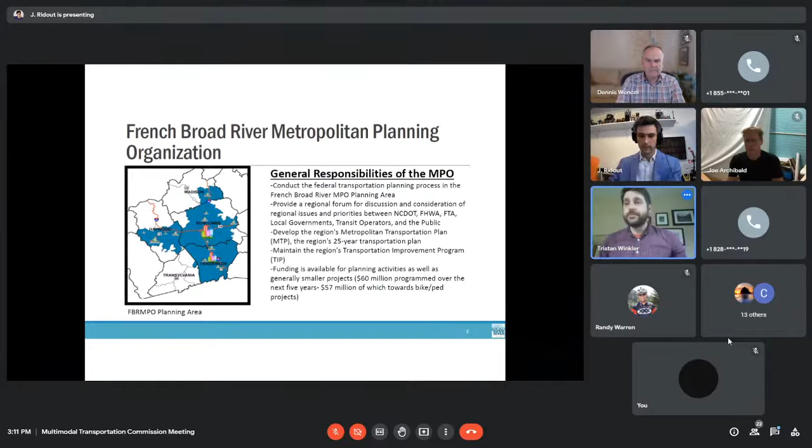So just a little bit on the corridor studies program that we've started very recently over the last couple of years. We see this as currently a partnership between the MPO, Buncombe County, and the City of Asheville. And also to note, we brought along NCDOT for these studies as well, and they've been fantastic partners throughout them.

Generally, each study provided multiple opportunities for public input. So it's a bit different in terms of the project development process that we've gone through in the past for other projects. Also, these documents are meant to give us a starting point for a vision of positive change for each of these corridors.

A lot of what's mentioned in the city's comp plan and some of the city's other transportation plans are really talking about large wholesale changes to a number of corridors. We haven't addressed all of them yet, but to get started on these two, really what we're talking about is changing the way these corridors work and how people move within and through them.

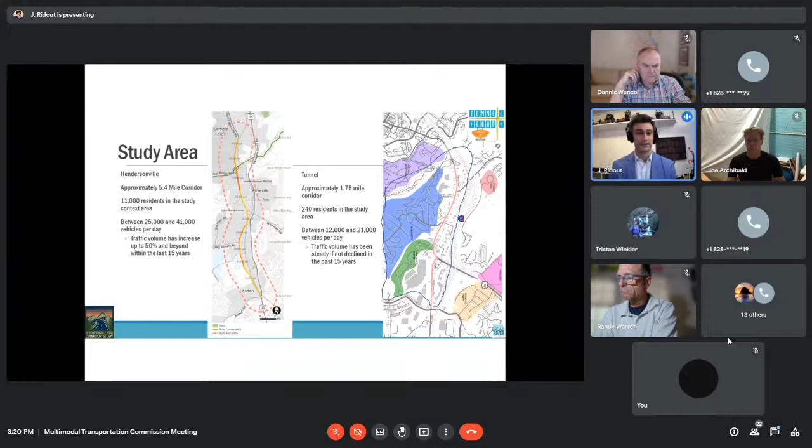In comparison, Tunnel Road within the study is actually a much smaller segment, and it only has 240 residents. While Hendersonville Road has been growing significantly, Tunnel Road's been seeing a different trend - its traffic volume is about a half to a third, and traffic volumes have actually been steady to slightly decreasing. I'll put an asterisk on that because unfortunately I-240 has been absorbing a lot more of that growth.

As a result of the different natures of both corridors, the consultant teams provided a different outreach process for each. Hendersonville Road provided more of what I'd call a broadcast outreach process with the community - they did a large online survey and held 2 very large public come-one-come-all meetings, as well as 6 visioning and design meetings in fall of 2020. So they had a numerous amount of meetings as well as focus group meetings, but considerably smaller in amount than Tunnel Road.

Tunnel Road, with its smaller population base, actually took a different approach. Granted, both of these studies took place during the 2020 COVID realities at the time. However, Tunnel Road had much more extensive stakeholder and focus group sessions - whereas Hendersonville Road had about 36 stakeholders, Tunnel Road had about 70. In addition, they conducted an NCDOT field walk in September of 2020, almost a year ago now, where we walked the entire corridor within the project. Then finally, they rounded things out with a large public meeting at the end to present the findings and take additional feedback. So both projects experimented differently with how to conduct public engagement during 2020.

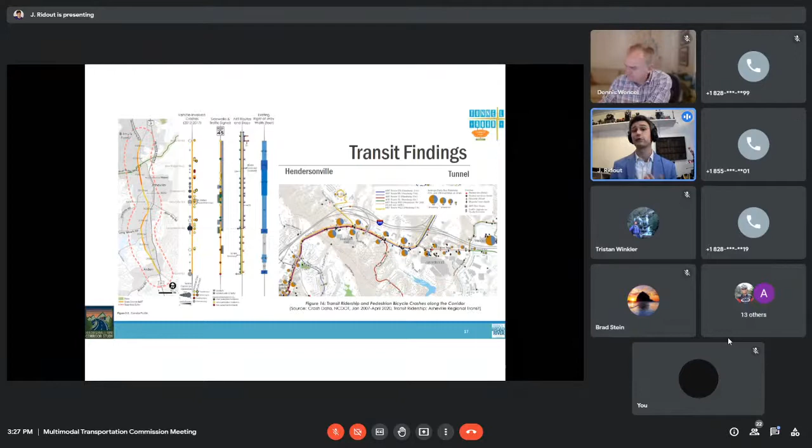We laid in some market findings as well. As I was saying earlier, Hendersonville Road is experiencing a lot of growth. However, it's relatively what the consultants called a firm situation, where we're not expecting a lot of the parcels to turn over rapidly. There are a few ripe spots for development opportunities, but for the most part, what we have on Hendersonville Road from the foreseeable short-term to mid-term future is kind of what we're going to have looking forward.

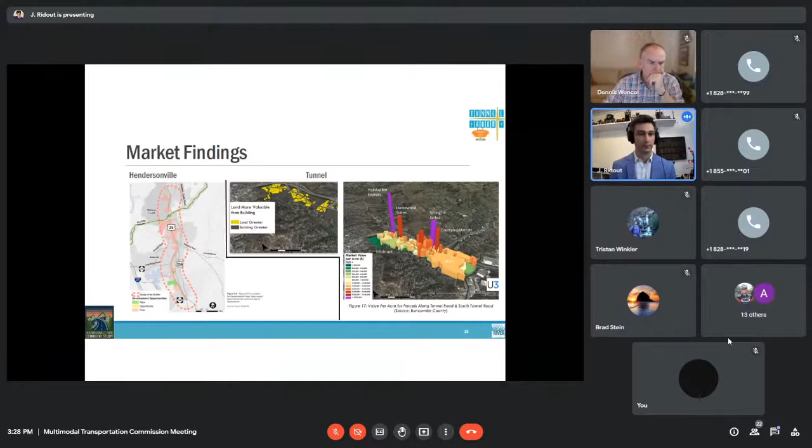On the other hand, Tunnel Road is a little bit more ripe for redevelopment. I think at this point in time, with both the mall redevelopment and Innsbruck, you're starting to see folks looking at this as a place for redevelopment opportunities. So we've taken the safety elements, the transit elements, and the redevelopment options, and layered them with what their existing plans are going to be proposing for this corridor.

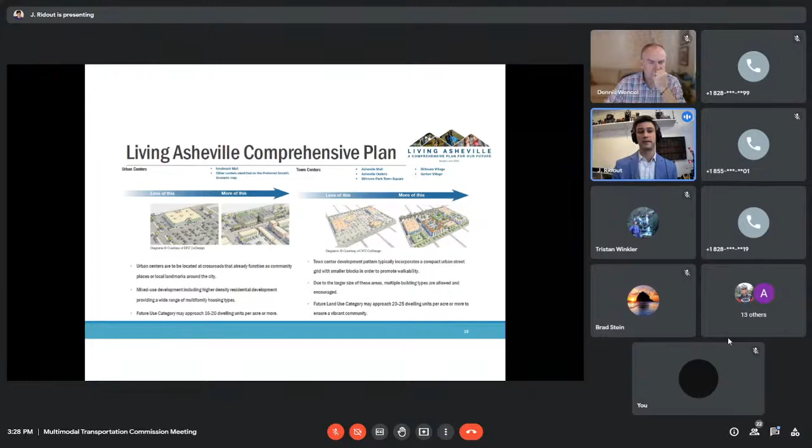So we're now saying, okay, what we know of the existing conditions, now let's layer in Asheville's comprehensive plan to see what the land use is going to dictate. The comprehensive plan is going to call out what type of transportation infrastructure we need to plan for and accommodate to make the comprehensive plan fold out appropriately.

Stepping back, looking at the recommendations at a glance, both of these corridor studies focus on safety, multimodal interconnectivity, and different options and alternatives moving forward. Neither of these studies is saying there's only one option. They provide a few different considerations, and we look at the pros and cons of a few items.

Of course, we're adapting existing plans, and both corridors are trying to transition from automobile dependent and automobile necessity to more multimodal corridors. However, they are going to differentiate themselves a little bit.

Tunnel Road is going to have a much bigger focus on redevelopment. It's going to look to transition from a regional automobile dependent corridor to more local multimodal use. It's going to require a bit more of a grid - a grid is going to be key for Tunnel Road.

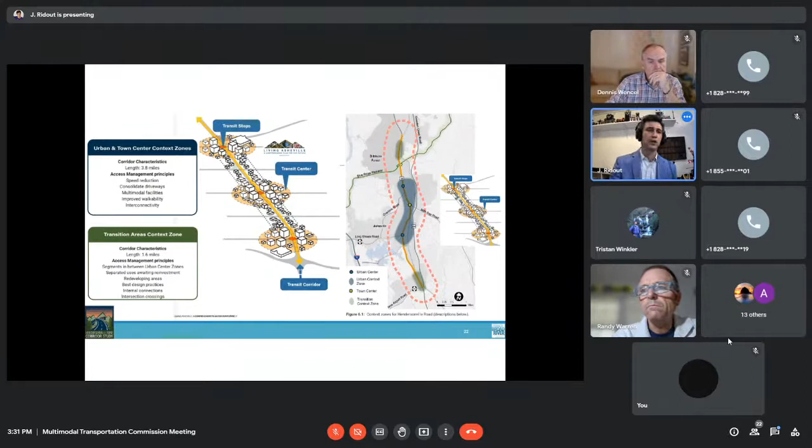So between just south of the Blue Ridge Parkway to Long Shoals Road, we're really proposing a full urban context zone, and a lot of the recommendations are going to flow from that. When I say urban context zones, what I'm focusing on here is, one, we're going to be keeping within the right of way of Hendersonville Road for its recommendations on the road itself.

However, within the corridor, it's looking at actually improving grid connectivity. It's identifying some of the constraints from the lack of interconnectivity - there's a major challenge there because the ability to get between, say, Sweeten Creek and Hendersonville Road, if there's any accident or issue, there's no connectivity in certain spots. So its recommendation is to promote and increase interconnectivity, increase interparcel connectivity.

But on the road itself, what it's looking to do is control a lot of the lane movements. In this case, you're going to have only left turns at specific intersections, and those intersections are going to get a much larger pedestrian treatment and options available to them, as well as improving pedestrian access, also promoting that 10-foot multi-use path along the western side of the road, although that path goes the entire length of the corridor.

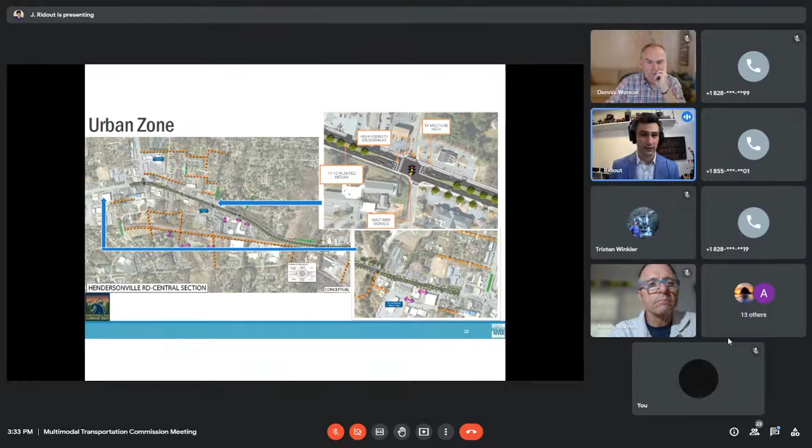So what does that look like to the end user? One, it's going to control a lot of the left turns, and I think that's an important consideration that focuses how this corridor comes together, because there's a lot of user conflicts as a result. In addition, some pedestrian improvements, pedestrian islands, and offering the option of a multi-use path on the western side would create better options for those trying to move along the corridor. Stepping back into the area around the corridor, it's about making sure you have that interconnectivity, the pedestrian access within the parcels themselves.

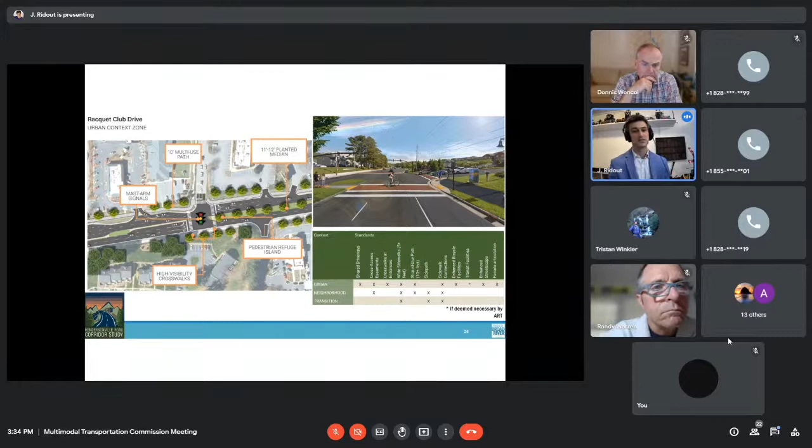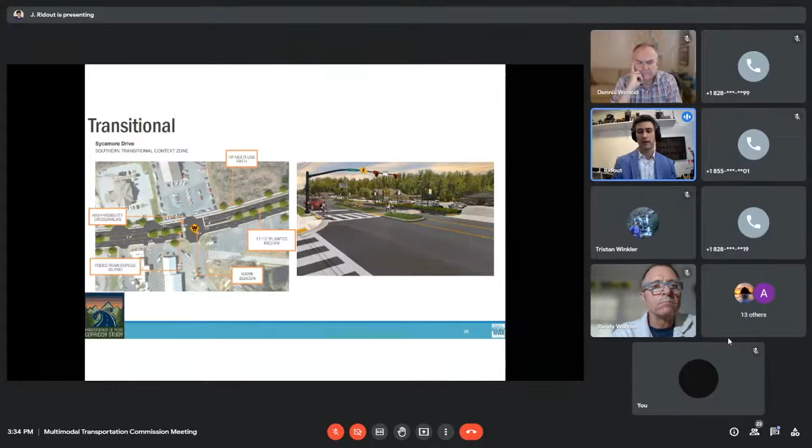So stepping out behind that, in the transitional stages it's dialed back a little bit. In some cases where there's a break in the ability for pedestrians or others to cross, they're proposing HAWK signalizations. They're keeping a lot of the planted medians within this area, but depending on the land use and parcels around it, it's not necessarily as hard a requirement as it is in the urban context zones. So we're still getting the 10-foot multi-use path, but it's building its way towards being more like that urban context zone without requiring the full urban context zone treatments.

Finally, they gave us a potential cost estimate. What they propose in improvements, they really tried to stick to the right-of-way, although they acknowledge that's not going to be 100% doable. There might be items that require stepping outside, but we're probably looking at about $23 million in 2020 or 2021 dollars. Of course cost increases are happening, but that was some of the things I considered: what can we realistically do and provide for an appropriate cost that will turn Hendersonville Road from that 5-lane wild west of automobile use into something a lot more accommodating rather than being a barrier to multimodal use.

So, moving on to Tunnel Road.

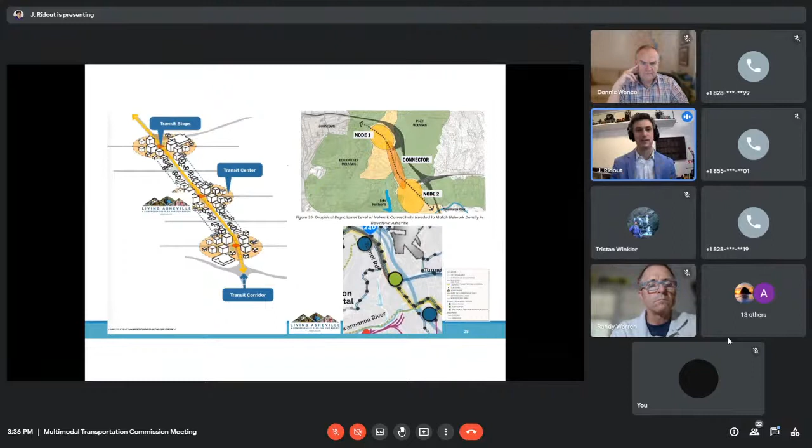Again, we are applying the urban and town centers approach to this. Tunnel Road calls out both an urban center at the intersection of Tunnel and South Tunnel, as well as a town center, and an urban center up towards where the tunnel currently is on the eastern side of the mountain there. But we'll acknowledge there's also another urban center proposed just south of Swannanoa River Road. It's just outside the boundary, but that's something in the back of our minds as we're doing this.

As I said briefly earlier, the main linchpin of the Tunnel Road Corridor Study is developing its grid network, particularly a north-south road probably on the western side of the existing Tunnel Road that extends as basically a parallel road. Right now, our options and availabilities in the no-build scenario, if we don't do anything to Tunnel Road, aren't great. But even if we can address a lot of the things on Tunnel Road, all of a sudden a lot of our options really bloom when we say, okay, if we can have an additional road.

And quietly, a lot of that connectivity is kind of already there. Particularly in the north section, it's just kind of open parking lots or connectivity between a couple of parcels where it's privately held. But if we can formalize this, then the options and considerations for Tunnel Road bloom exponentially. So when we talk about a parallel road, we're looking really at a 2-lane street that's close in and readily available for development. It's not going to be something like another 4-lane road.

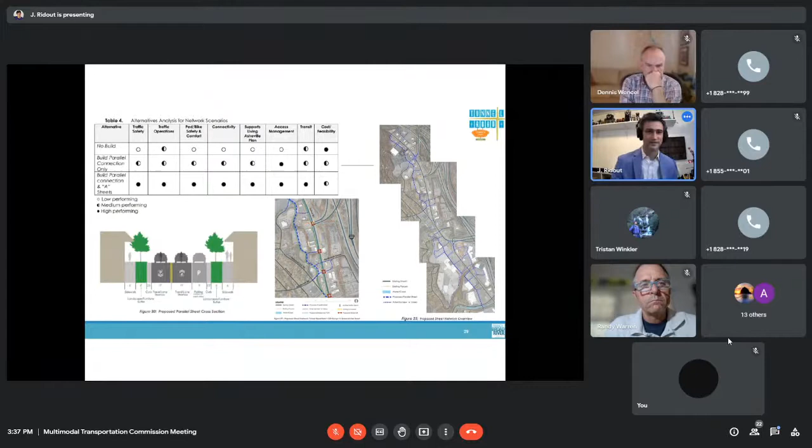I think sometimes there was a worry that we were building another Tunnel Road. But what that does allow is probably something very interesting for anybody in the multimodal group: anytime I can say, hey, let's consider a road diet, that's going to be significant as a recommendation coming forward. So one of the recommendations coming out of this is to actually create a road diet on the northern section of Tunnel Road and drop it to 2 lanes with a turn lane. If we can do that, you can see a lot more improvements coming on. As I said, Tunnel Road's been seeing a decrease in traffic volume.

Some of the volumes we're currently seeing, from about exit 6 north, we could accommodate a road diet down to 2 lanes at that point. Conditions would improve for basically all users if we can get that parallel road working, but that's an option available. The road diet analysis was done and it looks promising.

One thing we heard from our DOT partners is that we can do a lot, but the one rule is we cannot impact traffic backing up onto 240. So we took a look at each exit intersection. One recommendation is that the exit 6 option at Chunns Cove Road could actually be a roundabout, working within the road diet option.

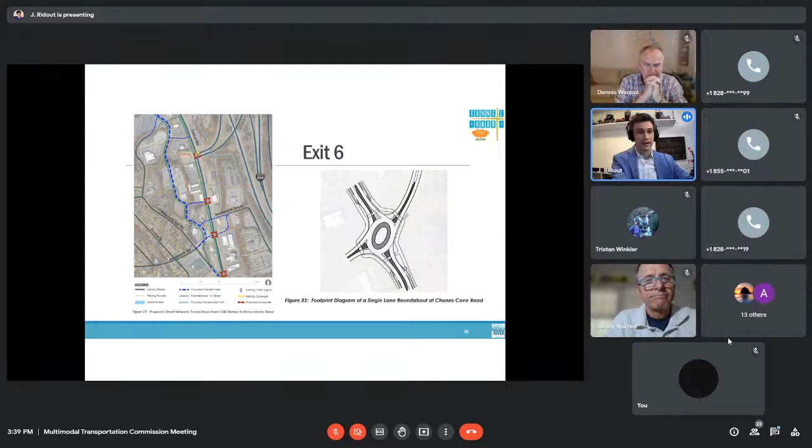Further down, closer to exit 7, this was another corridor intersection we needed to address, and there's a couple of options there. We did look at a roundabout in this particular area, but it didn't perform very well.

Two other alternatives, depending on whether we can get a parallel road. On the left, you have something working within the existing context of the road that can improve the flow of that intersection. Another option is slowly adapting that grid overlay, reducing the travel lanes that have to cross each other, which would make it a lot easier for pedestrians and other multimodal users to get across.

I don't know if many people have walked that corridor, but if you're coming from Tunnel Road, on the other side of the intersection you basically have to walk to the smoothie shop, walk south on South Tunnel Road, cross the road 3 times, and then continue north along Tunnel Road. It's not a very useful option, and as a result you see a lot of goat paths where folks are taking that risk.

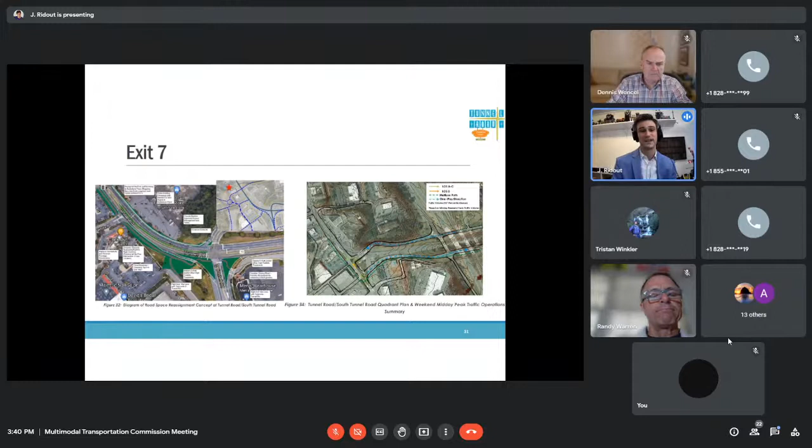So getting back to looking at the different options, we looked at how level of service happened with existing conditions, if we worked only within the right-of-way of Tunnel Road, and if we can get the parallel road with redevelopment and other opportunities. For the most part, we can take a road diet fairly well south.

Up until that I-240 off-ramp just before it starts coming up into exit 7, not quite that far south, at that point we're still probably looking at least a 4-lane cross section, but that's more of an option driven by that interstate interchange there.

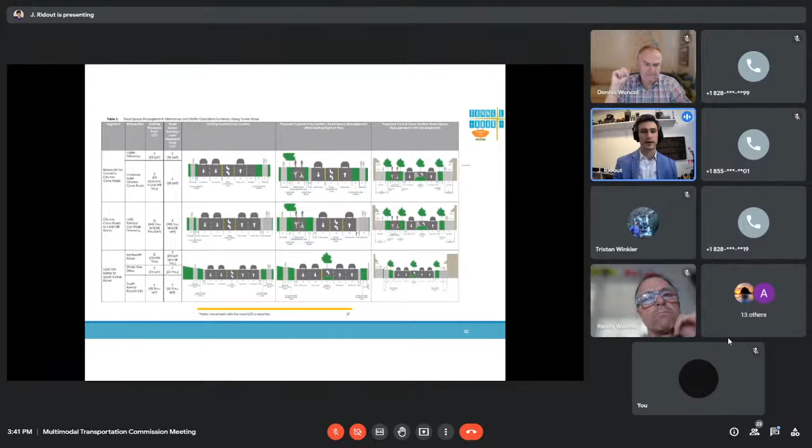So those were the different options we're looking at moving forward. You start seeing these cross sections develop where, existing, we have that 3-4 lane thing right before the tunnel. We can actually work within the existing right of way to provide that separated multi-use path.

And with redevelopment, we can expand some of those options that make the multimodal experience a lot better. Closer to the off-ramp, you're seeing a very similar condition. So at Chunns Cove and that off-ramp, we can still keep things narrow, more of a pedestrian multi-user scale rather than a 4-lane highway there.

But once we get further south, that's when we're seeing that Tunnel Road is still going to exist as a 4-lane road, at least at that particular point. Depending on how redevelopment happens, there could be other options, but that's at least what the data was pointing toward in that situation.

So as a whole, to make all this work, the consultants on both ends provided a lot of different options. The key takeaway here is that to make this happen, and to make it happen on an established timeline, all parties need to work together. The city itself needs to have what one consultant called skin in the game.

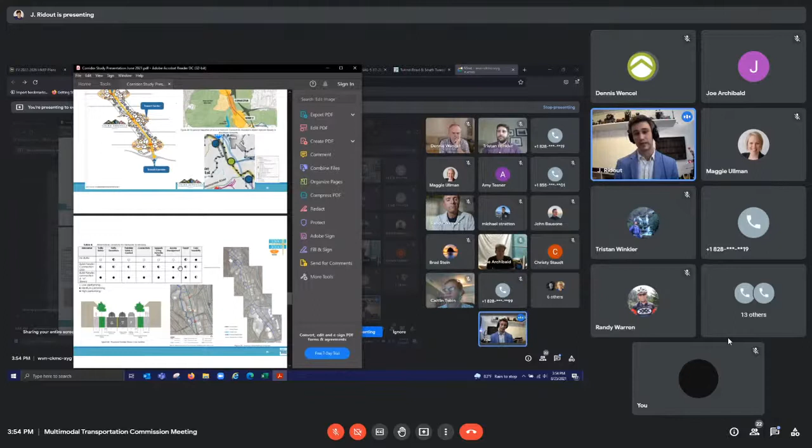And through that additional redevelopment connectivity, we will have better pedestrian access, just through the sidewalks through those properties or through these adjoining grid networks. So you'll build out that pedestrian grid. And I think that would actually keep traffic volumes relatively low, as far as making it more comfortable for other non-vehicular users to get in and out of that area. Was that what you were getting at?

Sorry, Tristan, go ahead. I was going to say, one of my favorite graphics from our consultant team is just highlighting the importance of building that network and how that influences pedestrian activity. It kind of shows, here's your downtown - it's very pedestrian friendly for the most part. There's a lot of pedestrian activity, and a lot of what the research points out is that it's because there's a lot of connectivity, there's a fairly well-established grid.

Once we get further out of downtown, especially in this area, that's something we don't have. And so that's part of the backbone of this recommendation - getting more of a grid network in there and helping to build out something that's more conducive to pedestrian movements.

Okay, thanks. And just one more follow-up, and then I'll pass it along. Are there established best practices where there are these cut-throughs or access points that are just bike-ped and not vehicle traffic, or is that not a good plan?

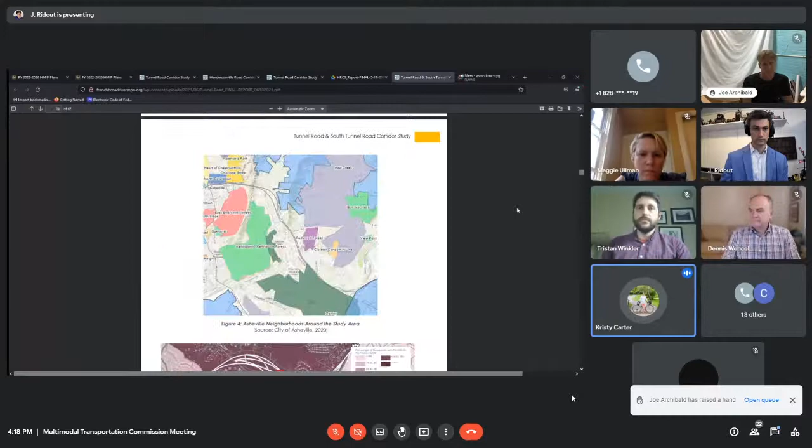But we had, if you look at the jobs that are along Tunnel Road, they are predominantly low-income jobs. I think it was, again, this is where my numbers I never remember, so they were those jobs are below $12,000 a year, something like that. And so kind of thinking through the multimodal transportation options and improving those along that corridor kind of goes hand in hand with the workers' needs that are on that corridor.

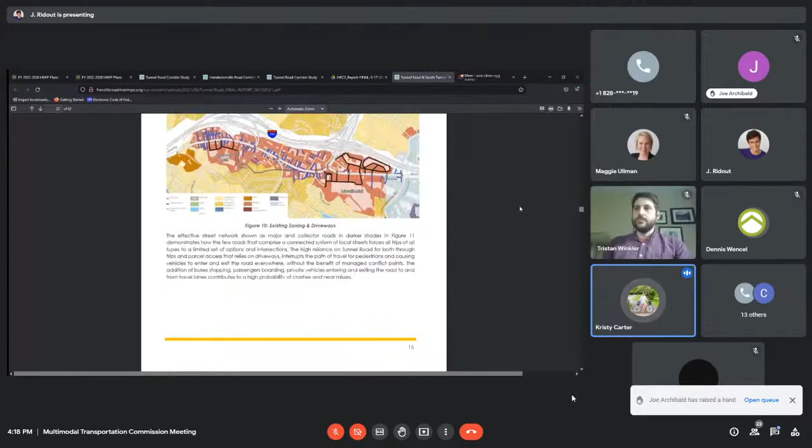We also talked to the hotel owners to kind of understand the worker transportation needs, some of the retail service providers to understand their workers' needs and things like that. So it's not as direct if you look at the demographics, but the conversations definitely were there.

I appreciate that, and my question wasn't because I doubted y'all specifically. It's just like I feel every time we talk about planning, we need to be centering this. Because it's really important, and because we haven't for a long time, and because the professionals doing the work look like people with my skin color. So just all the reasons it should be coming up.

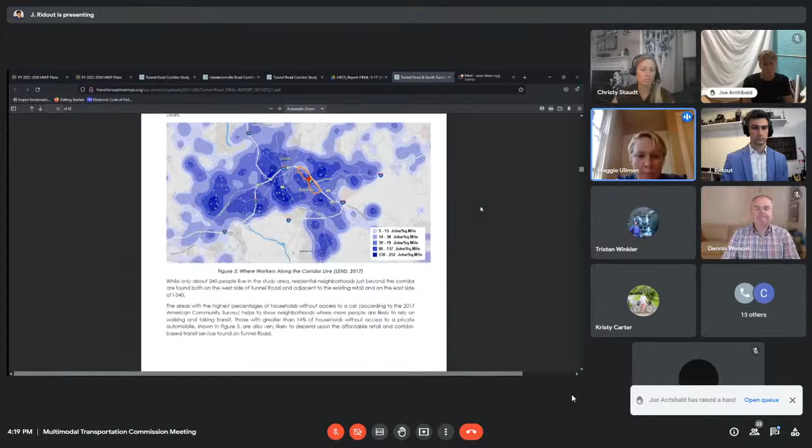Another thought though is like how we get into the system change element of what planning does, and talking about the workers in that corridor now and their class and their earnings, and then by proxy, their race sometimes because of the way that our society is. If we actually are redeveloping, how likely are those jobs actually to stay there? And what is the impact that we're creating then? And what are the amenities and the infrastructure we're building, and who are we building that for? Because as we start to redevelop, are we redeveloping for more Red Lobsters?

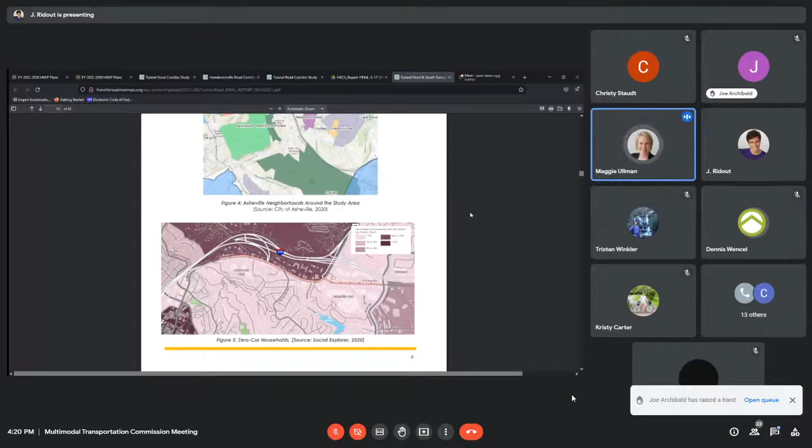We're probably not. So then who are going to be having the jobs in that place, and how does that relate? I understand this is a corridor study and y'all aren't here to solve everything, but I feel it's our obligation and responsibility as leaders doing the planning, and as advisors, that this stuff needs to be in the mix of our conversations.

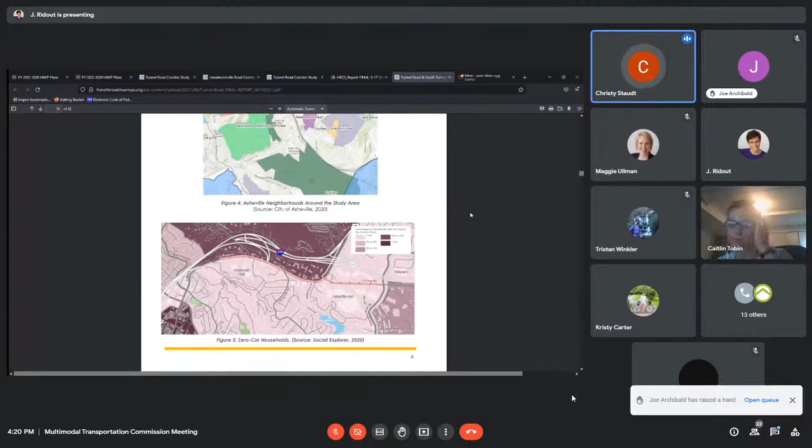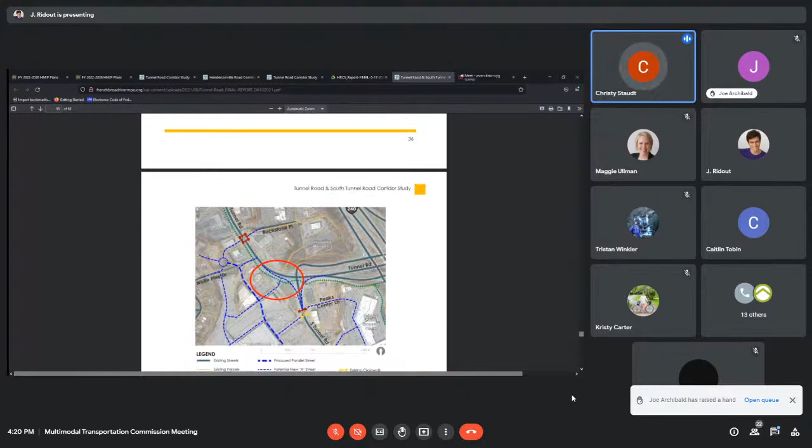This kind of lends itself to the White Pine intersection. I don't know, John, if you have a good image of that. So we identified a catalyst project that could be an affordable housing partnership, and also tee up one of those intersection improvements that would open the option for the road diet above White Pine. There were some undeveloped parcels, and we know the Days Inn has some plans there. So we had some meetings with the city and planning staff about really thinking ahead about what it's going to take.

You can see the red circle on the left side of this image, and a connection at White Pine and then into the mall, connecting to Buckstone Place. So an intersection improvement like that, we had met with the city to talk about whether there's a way to get the infrastructure in place, but then also for the city to purchase the land and maybe work on a private partnership for redevelopment for affordable housing or the Days Inn. So we even shifted our design to avoid impacting the Days Inn, because we found out what Homeward Bound was looking to do there. So definitely something we were thinking about.

I think there are a lot of opportunities for this along Tunnel Road if someone were to come through and really target certain parcels to develop the road, but also use vacant parcels or divided parcels into developable pieces of land. So it's really going to take some leadership, but I think there are some really good opportunities here.

I appreciate y'all's feedback and thoughts and hearing into it more. I really do. Thank you.

Joe? Did we lose Joe? Probably gonna pop back on and give me a quick... Sorry about that, I thought I hit the microphone.

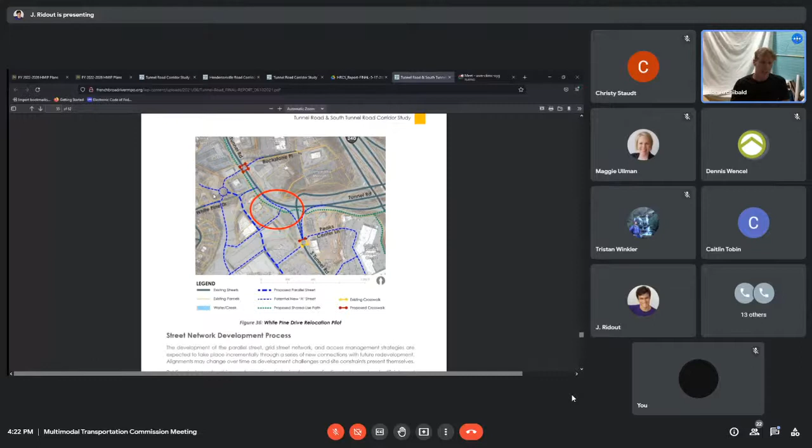I just wanted to first thank Tristan and John and both the Christys and Caitlin. John and Tristan had come to Planning and Zoning last month and presented, and we had a really great discussion. One of the reasons I had asked to bring up that Innsbruck Mall image at Tunnel Road is to respond to Maggie's comment about those roads.

It's interesting, as I've ridden my bike, one of my routes is either coming down off of Bowcatcher headed towards Chunns Cove or vice versa. I've taken that road - I can't remember the name of it, it's right there coming up from the bottom, something Springs Road. Actually, Mineral Springs, yeah. That's it. And you can actually connect up through, people might remember when the Dollar Theater was back in there behind the Office Depot, and basically you come out right there at that intersection that leads you right into Chunns Cove.

That's kind of the example of creating these roads, because you're in a drive aisle - I mean right now that is the road. If you're coming from Chunns Cove and you go straight through that intersection, you're in a drive aisle, but it's a road. Part of the idea with this urban place rezoning that is working its way through planning staff and then planning and zoning is that parcels like this would have requirements to better create these roads that in a sense already exist.

So, bouncing around a little bit, one of the things I really appreciated and mentioned to Tristan and John when this came to planning and zoning is - if everybody here at Multimodal hasn't dove into these reports, there's a lot of information, especially on the Hendersonville Road one, I think page 108 or 109, where they go into recommendations of changes to the UDO to help make these things work. I really like this because the MPO is focusing on transit, obviously, but it needs to be a focus on both. You have to have ideas for how you want to deal with the transit, then you have to deal with the land use and the zoning and the planning that then helps support that.

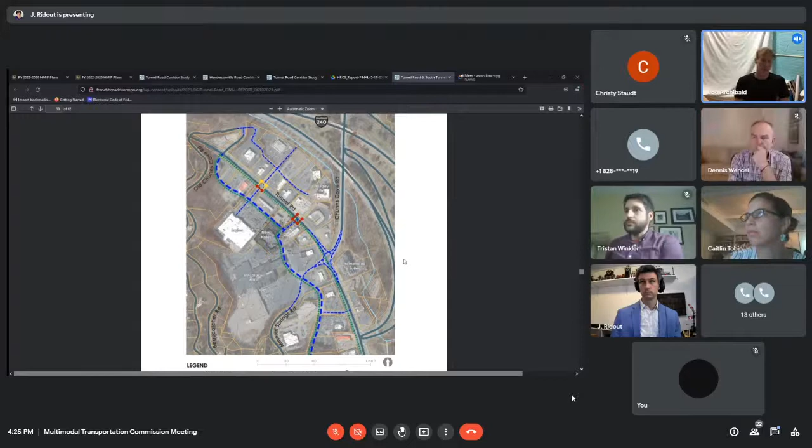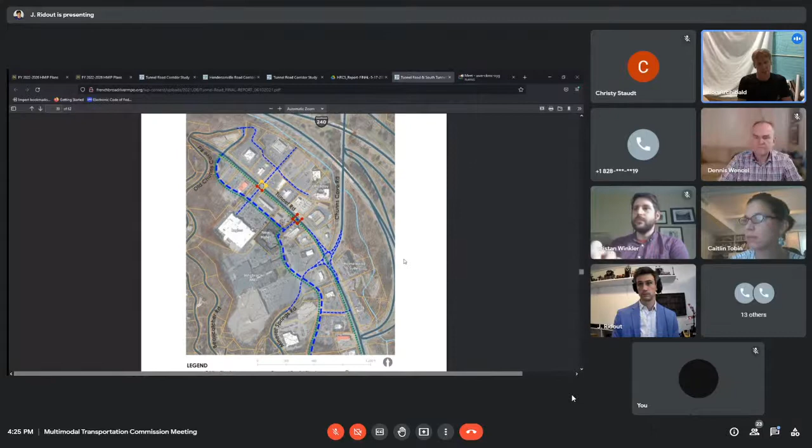And again, like this urban place, we have these drive aisles that could create a future grid network. When we get the land use and zoning in place, then it will create that future grid network, and this idea comes to fruition. It's a lot of stuff that has to happen, and I really appreciate that this has been included already. Even what Christy Staudt was mentioning there at White Pine, some of these intersection changes or improvements could then lead to other parcels. I think there's a lot of really great information in here, and I appreciate everything the consultants have done. Hope everybody can get behind this for however long it's going to take to get these to happen.

Yeah, thanks Joe. I think that's a really good point. And I think one thing our consultant team did a great job of is, even though having a new road connection is a big haul, I think the way it's been set up is through that kind of piecemeal, informal network that already exists today.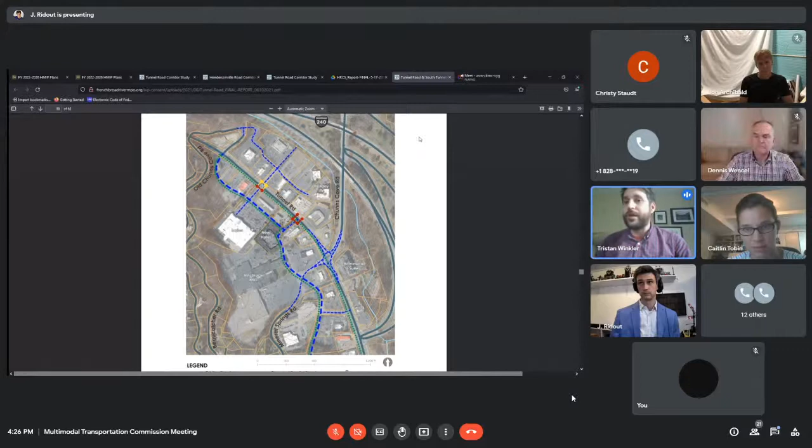One of the things that caught our attention when we were evaluating different corridors to study was the data we pulled a few years ago showed very few crashes on South Tunnel Road. We were kind of like, well, that's very strange, what's going on there? When we pulled back, we saw that if you look at South Tunnel Road and those connecting roads on either side of it through the parking lots, there's a ton of crashes, because there's a lot more movement in that informal network. So formalizing that and then building a bit more of the network out, I think that's going to be how we get that piece done.

Excellent. Any other questions or comments from anyone?

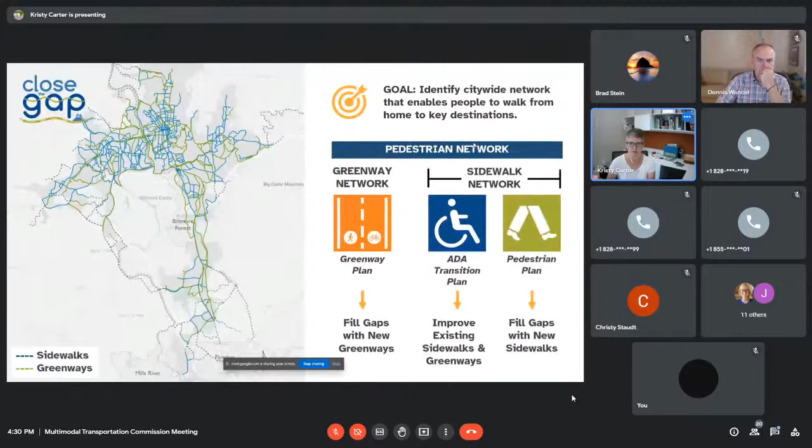So this is what we'll show to the public tonight. Give me a second to get to where we're going to start with you all. This is exciting, watching me flip these slides.

So where we're going to start is we're skipping all of the background of what Close the Gap is, and if you're new and we need to hit that for questions at the end, we can do that. But what we want to start with is a mutual understanding of what we know about our city, and we know that there are places that people need to walk, but we have missing facilities.

This is an example of Thompson Street here. We also know that there are places all across our city where there are sidewalks, crosswalks, curb ramps, but they're not easy or almost impossible for people with disabilities to use. They maybe can't use them, or they have a hard time using them. And that falls under our ADA transition plan.

And then we know that there are people who want to bike or walk greater distances. They might want to get from one end of town to the other, and we don't yet have the connected Greenway system. We want and need that so people can have this crosstown travel, kind of like the interstate highway system of our pedestrian network.

We also know that because we have lots of needs, we have to have some type of prioritization process, because the city can't fix and build everything at one time. Christy, when she takes over, will talk to you a little bit about the estimate of what it would take to build this priority network that we've been thinking about. We can't do it all at once, so we need some priorities. Next we're going to talk about the process we went through to prioritize this network that we're bringing to the community tonight.

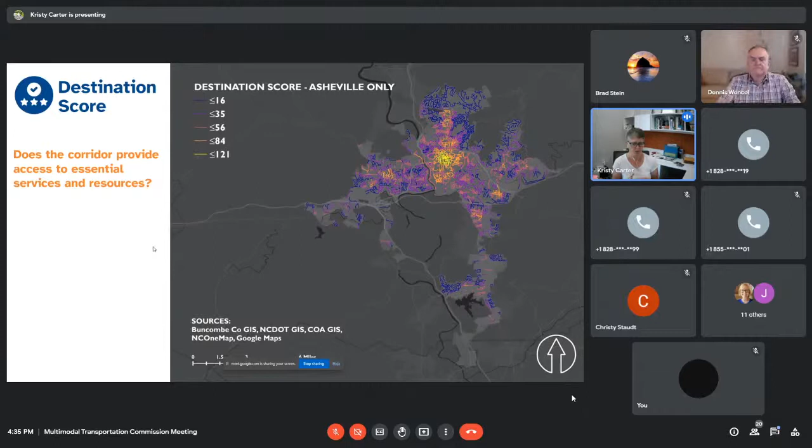So when we think about downtown, which definitely shows up as a destination hotspot, think about Buncombe County services, both health department and social services. We think about the bus station, grocery stores, VA hospital, all of those essential places, and we have those listed here. We start layering those. So if you have a grocery store next to a hospital, next to a transit stop, next to a park, next to a city facility...

That area is going to pop up really high as a pocket of essential services that people need to access. But then when you lay the places people need to go and overlay that with the areas that have the highest equity need, we come up with our most important hotspots. So what that's saying is people need to access these essential places, and in particular, these lower income or equity neighborhoods where we have concern about equity - those are the folks that generally most need to access those services. So we have to figure out a way to link those.

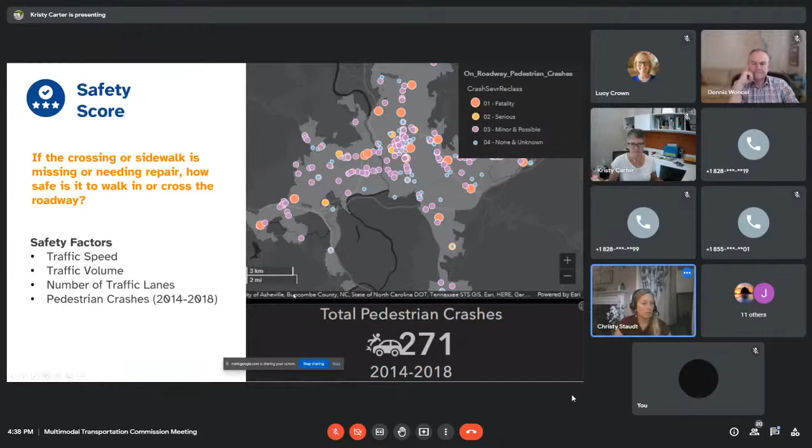You can see that image on the right was our crash dashboard - we can provide that to folks if they want to see it. It's basically all the crash history for the city. So we gave a score based on safety, 0 to 5 points based on those factors. And we added an additional point if there was a crash history - 1 to 2 pedestrian crashes - and plus 2 points if there was a fatality or a cluster of more than 2 crashes.

So we combined that with destination and equity. And then what we did find is there's some streets that we don't know the traffic volume on. We don't have accurate speed volume. So it's like anything less than 9,000 vehicles per day, and we don't have a count. So how do we avoid having cul-de-sacs on our priority corridor list? So we came up with this other factor, which is the next one here, connectivity. So how do we make sure these are actually key roadways, links needed so that people can walk from home to wherever they need to be?

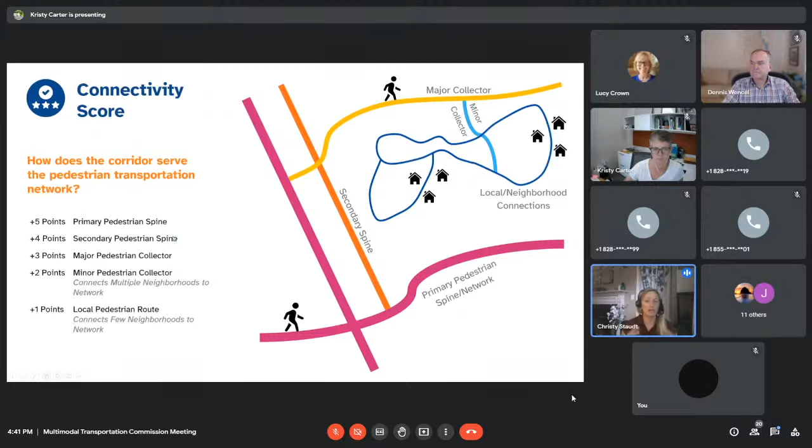So we combined all these to give us an idea of where are the hotspots, and to lead into our next phase of this project. So before we go into the results and I show you how that all panned out, this next slide is to just kind of go over how we're going to use those scores.

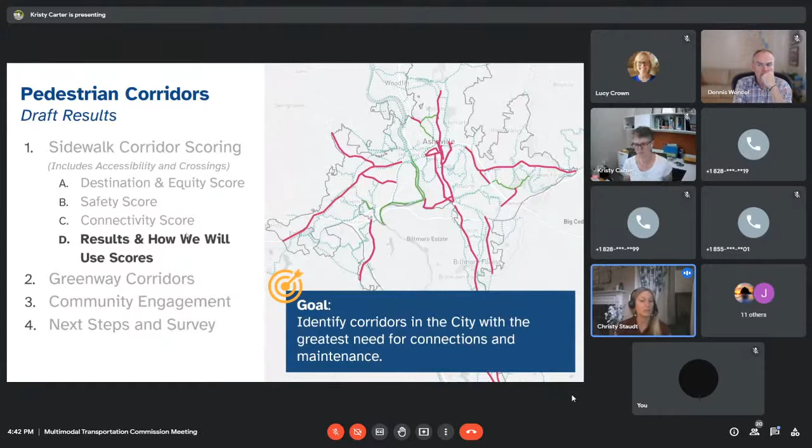So one is the goal is to identify corridors with the greatest need for new connections and for maintenance of our existing sidewalks. So on this next slide, you'll see those will go into 2 plans. So the first plan will be the ADA transition plan. And just to be clear, that's often a different funding source than new sidewalks. It's about upgrading what we have. It's a civil rights law that the entire city needs to be brought into compliance. So it's upgrading facilities, and it's also policies and recommendations to make sure we keep the facilities clear and open, and to make sure new facilities are getting built to standards.

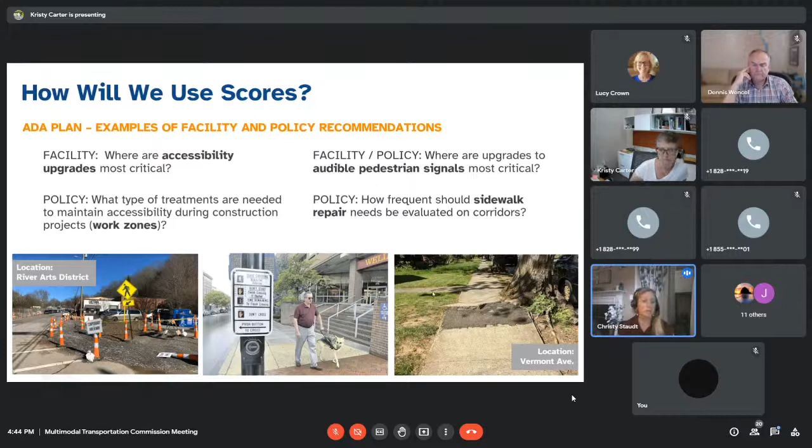Then there's also the pedestrian plan, which will be new facilities, expanding the network. We know we can't do it all at once, so where do we prioritize? Also, are there some roads we want to actually change policy and do sidewalk on both sides? Hendersonville Road, Patton Avenue, really pushing that. Also, do we want wider sidewalks or better separation from traffic? And how do we want to address pedestrian crossing safety? So these policies are something that will be put into the plan.

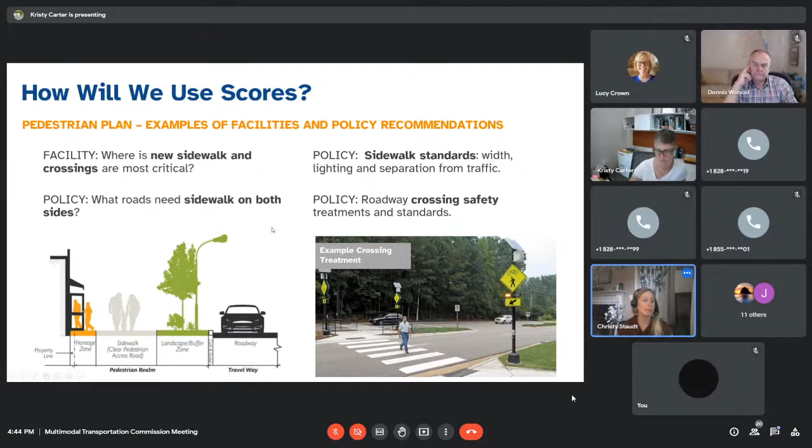With that, what I want to show you is how this panned out. In the survey we're providing, there's a tool where you can explore this and see the different groups of scoring. We broke it down into tiers: 13 to 17 points is tier 1, tier 2 is 10 to 12. As it goes down through tier 5, we're going to step into the next phase of this process, identifying policies based on those tiers, policies and standards, and also identifying infrastructure needs and defining projects. You'll be able to explore that as we go.

As you get in there and explore in that tool, I want to give you a high level view. Tier 1, 13 to 17 points, is to be expected mostly DOT roads—those that have high volumes and high speeds. A few city roads are Patton Avenue, downtown, Lexington, Asheland, so they have a little bit of a different nature. Many of these either have sidewalks, so they'd be part of the ADA transition plan, or they're already funded, planned, or in study—Merrimon, Tunnel Road, Patton Avenue, New Leicester, Sweeten Creek Road—those have NCDOT projects.

When it comes to policies that might be considered in this realm, we haven't determined this fully, but one is how do we address funding. If they're NCDOT roads, we have an opportunity for partnerships, so it's not maybe fully on the city. These will be the higher priority for ADA upgrades and maintenance, and for sidewalk on both sides. These are often transit corridors, and likely these will be the corridors that need wider sidewalks and enhanced pedestrian safety at crossings. An example on the bottom right is Sweeten Creek Road—you can see a 5-lane cross section at high speeds, which would not be safe to walk in if necessary.

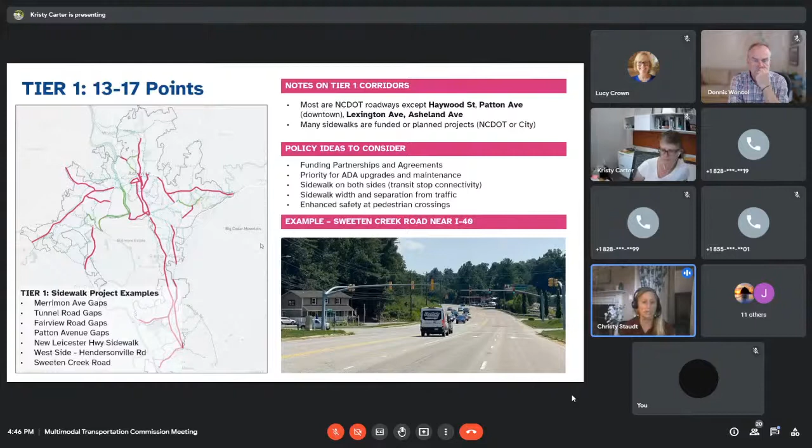Tier 2 is similar, but we also start adding in some smaller side streets. You can see some clusters here—Shiloh, a lot of those roads are in this tier, out in Deaverview, downtown. These are areas where it's really important that we do regular maintenance for ADA, but they're not all the same type of road like tier 1 was. We have something like Brooklyn Road in Shiloh, a really short, low-volume road, versus Sardis Road in Enka.

Again, many of these projects are funded or currently planned. The downtown orange cluster there will largely be ADA transition plan locations because they have sidewalks. These are also opportunities for some partnerships, and we may see the policy vary here—it may be more based on safety. So if you have a road that scores really high on safety, we may still want to look at sidewalk on two sides, but many of these roads won't need that.

That's just an example of what you see. A couple projects here would be Overlook Road gaps, Springside Road down in Arden, New Haw Creek Road, Livingston Street, Deaverview, London Road in Shiloh. So you can get an idea of how this is all panning out. One other example is the photo of Rock Hill—I'm sure many of you know that's a pretty high volume roadway and pretty tough to move as a pedestrian. That's one example of a tier 2.

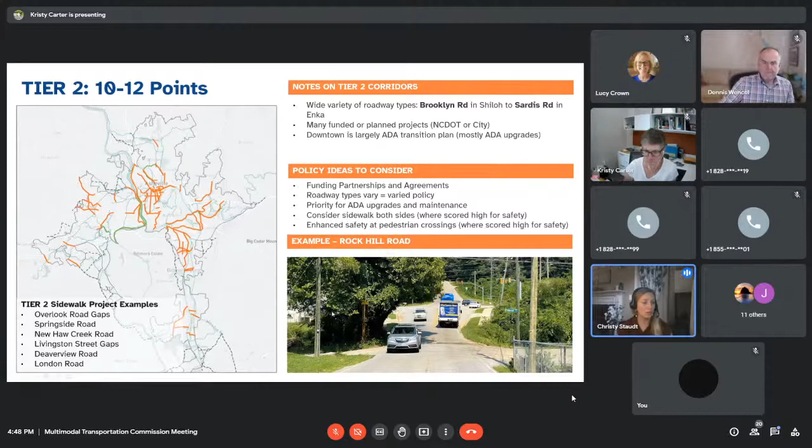I can go a little quicker through tier 3, 4, and 5. This is where we get into, again, a wide variety of roads—you have Sand Hill Road in West Asheville versus Hillside in North Asheville, which is a really urban east-west street. So policies will vary here. Some of the policies we're going to think about are shared streets and traffic calming on those lower speed, lower volume streets. Many of these roads are going to be part of potential neighborhood greenway alignments.

Some of the projects that rise to the top are Brevard Road in West Asheville. The photo on the bottom right shows one of those roads where there's a worn path on the side with no sidewalk, and it's hard to cross there. So based on volume and speed, the likely policy in those instances would be sidewalk on both sides. We also have Riceville Road, Kenilworth, and Lakeshore Drive is another good example in North Asheville, where there's really no other place for people to connect to the network, so they're walking there where it's unsafe.

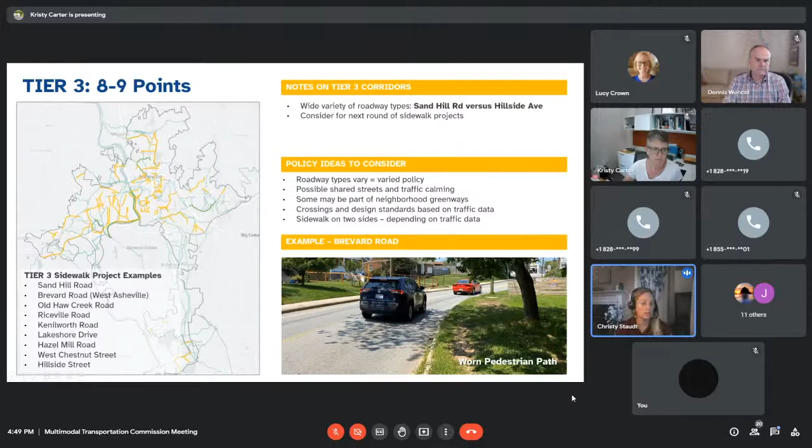And so tier 4 is where we're really getting to the meat of likely next bond projects, the next round of new sidewalk gaps that could be funded. Many of these aren't funded yet. They'll often just likely be one sidewalk on one side because they're low volume, lower speed streets, but they're still part of the key network.

And many of them will also be part of neighborhood greenways. Some of the roads that rise to the top here are Michigan Avenue in West Asheville, Merrimon Avenue up above Beaverdam Road, and Pearson Drive in North Asheville. So as you explore these layers, you can see where they pan out.

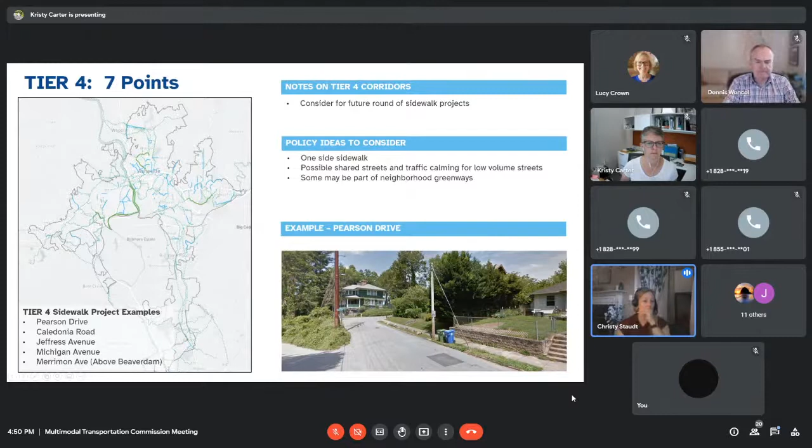And then tier 5 is similar, I'll just go over a couple projects there. Joyner Avenue, the photo on the bottom right, that's just above Amboy Road, and I believe that is on the list of potential sidewalks for the next bond. So you can kind of see where those pan out after this analysis.

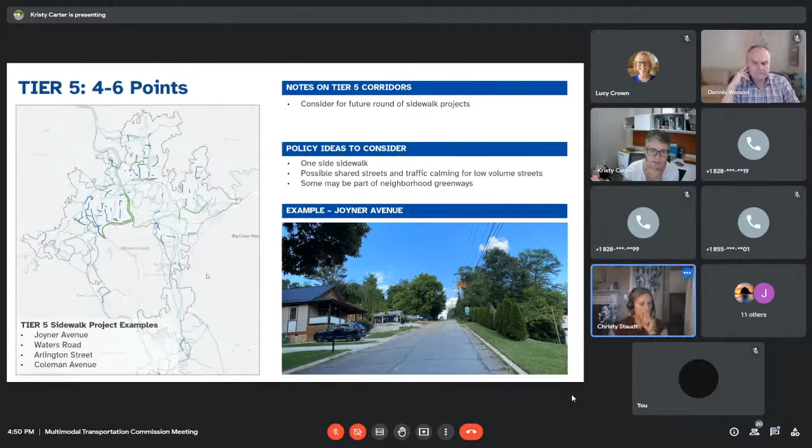So what we're asking people to do is take a look at that tool, and we'll go through that with the public and just identify if there are any missing links that we should have scored before we move into project development and policy recommendations. So that's kind of our checkpoint here: did we miss any key roads that are really needed to move around the city?

And I think we're out about 10 minutes. I think I can get through the Greenway work quickly. Kim from Equinox has led our Greenway analysis. She wasn't able to join us today, but I'll go over that briefly.

As Christy talked about earlier, the goal is to have a Greenway spine so people can get around town. The process we went through: Equinox did a full constructability analysis to look at the previously planned greenways, constructability, environmental issues, available land, future development patterns, and refined that spine network. So there's an expansion and refinement of the spine. That was the first task.

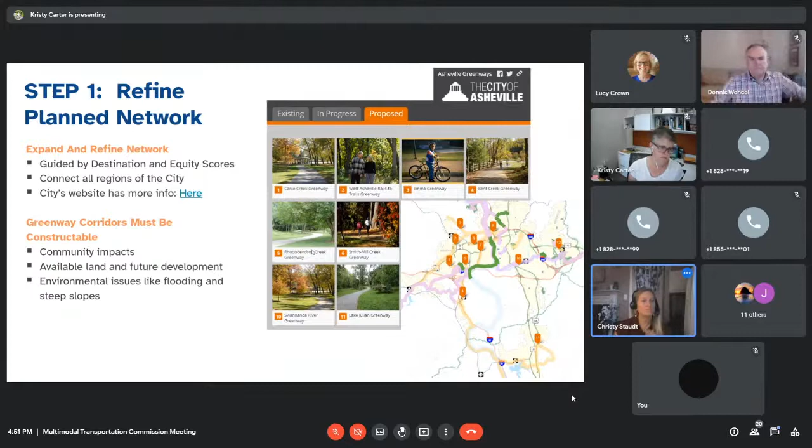And then the second task was to really look at building out beyond the spine. This is similar to the PED network in that there's got to be a whole system - how do you get from your door, from your home, to where you need to go in town? So really looking at different typologies. What a Greenway spine might look like is different from what needs to get to your neighborhood in North Asheville or South Asheville or wherever you're at in the city.

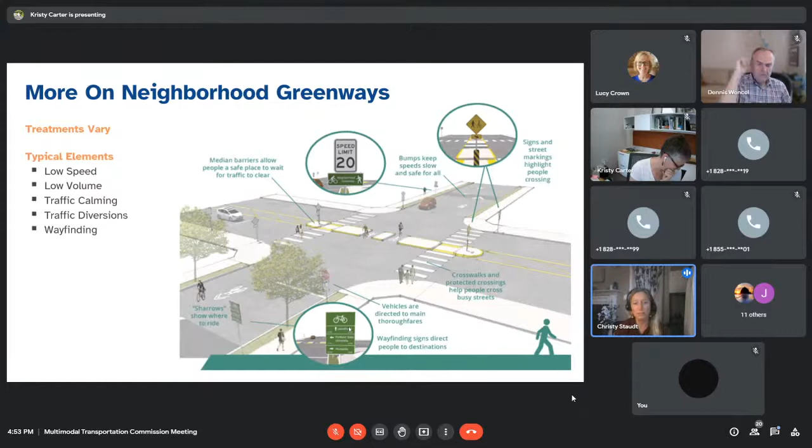Merrimon's a real obstacle, so how do we develop neighborhood greenways so folks can move to and from downtown into North Asheville or West Asheville, all the different areas of the city, using these slow streets networks. They're often slow speed, low volume, traffic calming elements, often diverting traffic where we can to keep it low volume, plus the wayfinding element and some branding. That's a new element we're including in this plan.

The results of that you'll be able to explore as well. There'll be a map and a tool, and we're asking people to help us weigh in, not so much on the spine, because the spine has to go where there's availability for across-town connectors. It's based on constructability. We want people to weigh in on the neighborhood connector alignments and the major minor connector greenways, to give the city some direction on where to focus next and if there are any critical issues with these corridors. So the next slide shows you the Greenway Spine.

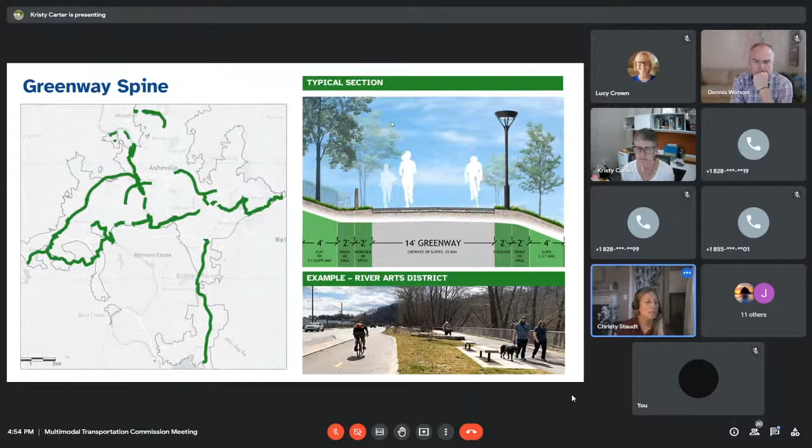Equinox is also working with Lucy to develop standards for those. They're going to be wider greenways, things like the River Arts District, Wilma Dykeman Trail, shown in the bottom right image. The major minor collectors are going to have a different standard. They'll often be slightly narrower, but still really important high quality of service connections. An example would be Reed Creek Greenway or Glenn's Creek.

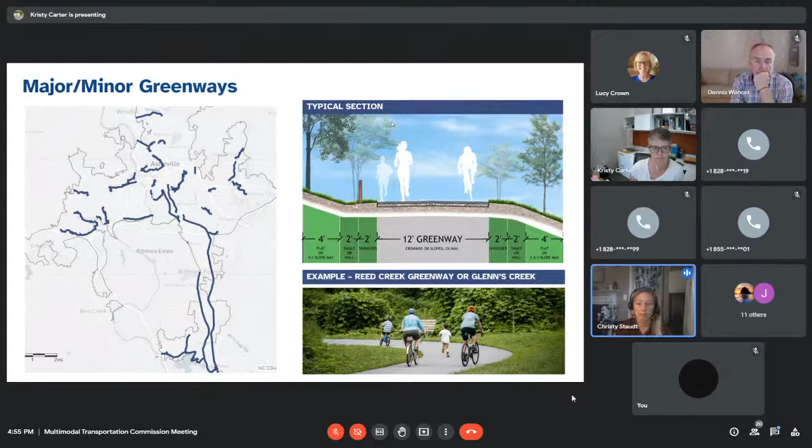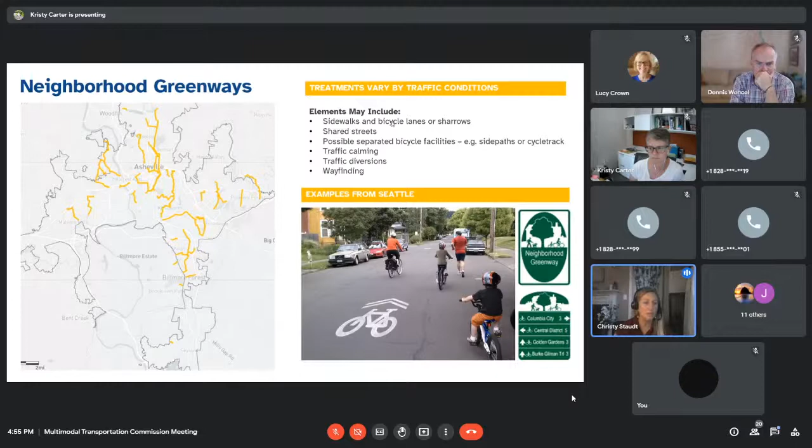There are many newly defined major minor greenways, and we want folks to be able to rank those and tell us what they think. Then the last set are the neighborhood greenways. We've identified corridors, gave them a name, a series of roadways, so those can be explored. Again, those are the shared streets, often going to be targets for traffic calming, wayfinding, things of that nature. So that's kind of what's come out of the whole greenway analysis.

And the next step for us is to get that survey results. Christy, I don't know if you want to go ahead and wrap that up real quick.

Sure. In terms of how we're going to use the input, the survey is asking people to confirm community priorities and identify problem spots in the network that we have designed. We're also asking folks to confirm ADA priorities, and that will take a little bit more work beyond the survey. We'll actually have focus groups of people who have disabilities. Those will be happening in the first couple of weeks of September to really focus in.

Is there anything that we missed? What do you need to get around? Where do you need to get around to, just to make sure that we got that right from the data analysis piece. This will be the community confirmation. Then we will come out after that with revised corridors and priorities, and start developing specific projects for funding.

So it's a lot to look at right now, but by the time we develop this and come before the community the next time, it'll be in bite-sized pieces that people can see more specifically. Here's where I live, and here are the projects that may happen near my neighborhood.

The other thing we want folks to know is that we will have another community input point for Close the Gap. But for every project that's out there, when it becomes an actual funded project and the city or DOT is trying to implement it, there will be another round of community input to get into some of those more specific details. So more input to come.

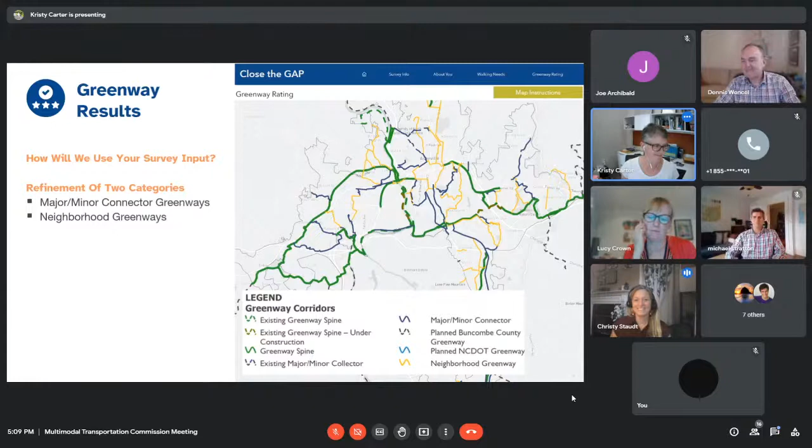Okay, I think Jessica had to step away, so we'll go through this without our fearless leader and see if we can muscle through. Maggie left as well, so we'll put the Merrimon update on the back burner and go into the general committee updates. John, looks like maybe—John, you got taken off? John is gone as well. All right, we're peeling off quickly.

The Greenway Committee—Lucy, we just had a lot of information on that. Is there anything else we need? I think we kind of covered it. The only other thing they've been working on is reviewing the I-26 connector projects and finding any recommendations that need to be said to the Aesthetics Committee and to Division 13 of DOT.

Okay, great, thank you. Next is the Bike Ped Task Force—can you give us a quick update? Yeah. The main thing at our last meeting was the Bike Ped counts coming up. We do those annually as part of a national effort to monitor certain intersections in town for bike and pedestrian counts. That'll be mid-September, the 14th to the 16th. We also talked about helping with the Close the Gap survey by counting and surveying people on a number of greenways. Grant, thank you very much.